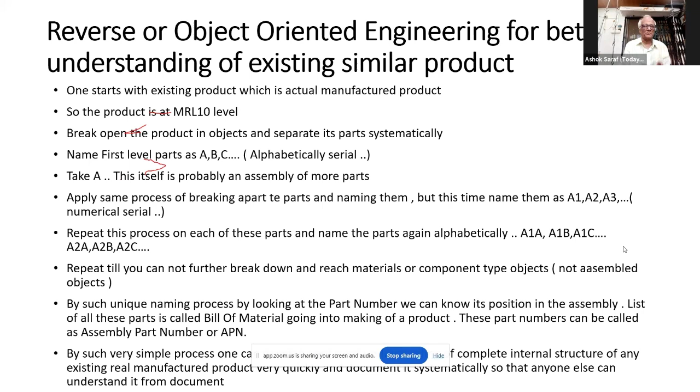Okay, next slide, please.

So the same structure view, because of this numbering, even if it is in the form of a list view, simply by looking at the name, you know the level at which the product is and who is the parent of that product. So this is a list view, which is typically what we have in a bill of materials. So by dismantling an object, dismantling a product, we can create a bill of materials. And by naming the products in a systematic fashion with alpha at one level and numeric at the next level, and alternating it again, we can have a list view so that we know precisely where that part or material belongs in the main product.

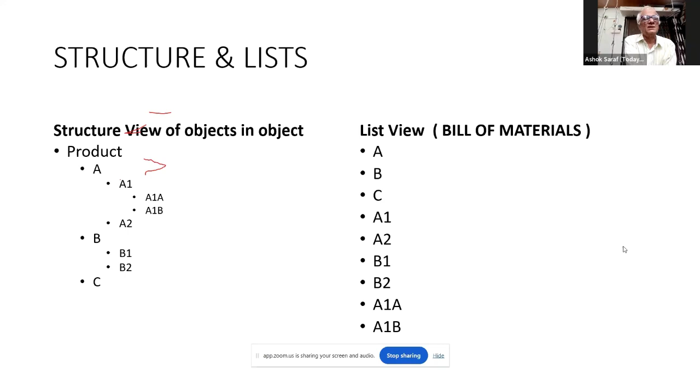Next slide, please. Now, the reverse engineering process brings you to the bill of materials. That means you get a list of materials, but it is useful for keeping track so as not to miss out any objects when you reassemble them. But how can we make use of it for entrepreneurship or for setting up a production?

Now, for each of the materials in the BOM, there has to be a process. So the simplest process may be a purchasing process to acquire that product from the market. When you go to the market, you can't just say, give me this A1B, which is looking like this. Of course, you can take a sample, make a drawing, or take a CAD model. Then you go to the market, find out if it is a standard item, then you know the manufacturer and have the manufacturer's part number for it, and that is when you can purchase it. You may have manufacturer 1, manufacturer 2, manufacturer 3, each one having his own part number. So you have MPN, manufacturer part number 1, MPN 2, MPN 3, to get 3 quotations from 3 manufacturers.

So a purchase process can be defined for purchasing this material, or the material may be machined. A part may be machined by acquiring a raw material and then machining it. So machining will be a process. You can describe the operations of that machine; it might be turning, finishing, facing, and so on. Or it might be an assembly, so the assembly process can also be described.

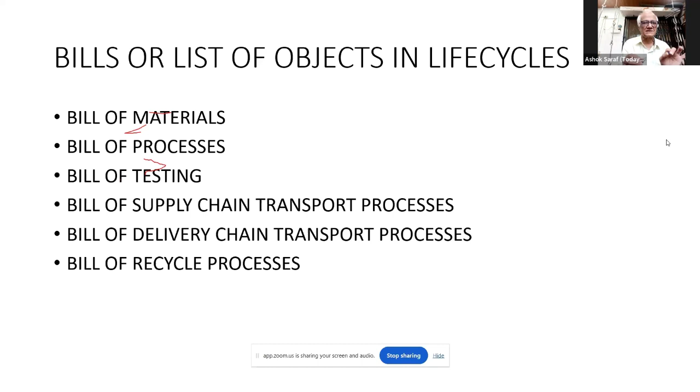Now, why do we create such lists? Everybody knows that manufacturing an item - really bringing it to life, hundreds of thousands every day - is a very complex process. Imagine manufacturing a Boeing 787, or even manufacturing an automotive vehicle - there are hundreds and thousands of parts. So there is complexity.

So we know that in companies, a divide and rule approach is used for dividing the whole into parts. Then you have processes for each part and processes for assembling them. That is how we can handle the complexity.

Now, if you make this list and generate this information, that can be a good starting point for taking decisions and working out scenarios - if something is changed, what other things will get impacted - because you know the interrelationship of parts within a product. You can even plan strategies related to production, distribution, and recycling based on this fundamental information.

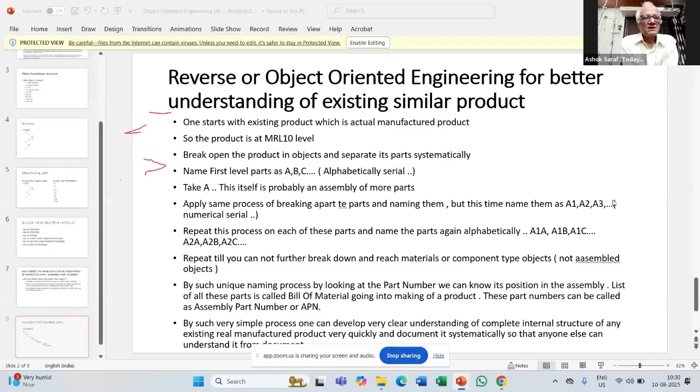Okay, so I think the idea should be clear by this time. Now, there are people who say, why this method is being proposed? Where did I think of it?

The story goes like this: about 40-42 years back, when my son was about 5 years old, we were coming down from Jejuri by ST bus, and as a time pass game, I thought of playing a game of Rachana. I would tell him an object - like the lamp in the ST bus, consisting of a cover, a lamp inside, and some wires - and explain its Rachana. Then he would tell me some object, and I would tell him the Rachana.

Within about 10-15 minutes, we were going from physical things to even abstract things, and we started talking about the structure of music. I was zapped - this 5-year-old boy and myself, within 15-20 minutes, got into a dialogue for critically analyzing things. I realized the power of the concept of structure, which we all know in manufacturing industry as well as in software. The structure carries very important methodology and a source of knowledge of relationship of things or objects.

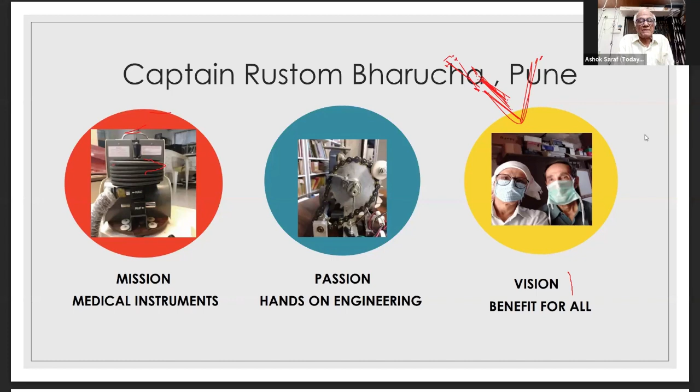He activated the entire ecosystem in Aurangabad and set up a capacity of producing 10,000 of these machines per month. Practically, he made about 100 part sets, assembled about 30-40, physically drove and carried them to AMTZ Vishakhapatnam, and got it tested.

Unfortunately, because it did not follow the modern ventilator principles of using electronic sensors and giving indications and alarms, doctors found it a very rudimentary though reliable device, and there was resistance to it. There was a special meeting in Delhi.

But the point is not that. The point is that this device fortunately was not required because Corona got over, and the normal expensive ventilators were made in large quantity and many companies got into it. But the process of reverse engineering could establish the manufacturing capacity of 10,000 ventilators per month at a cost less than 10,000 rupees each - that was an achievement.

Now, reverse engineering and understanding products - we have seen this every day in the repair mechanics on the street side. We have also seen how IBM PC was well documented, and if the information was available in documented form - circuit diagrams, materials list, software listings, and so on - how Taiwanese could manufacture IBM PCs, so much so that all other models of computers are completely forgotten now, and we only know computer as a PC.

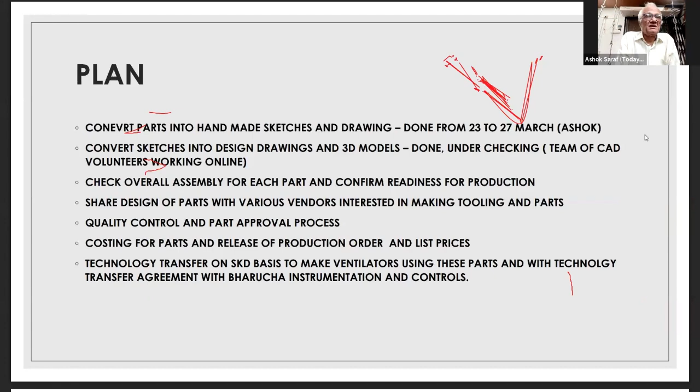China has used this very much. Japan used it very much. When we were in Philips, there was no Japanese student, but we were told that when Japanese come, they would document everything by seeing things, and then they would start making it. And so this process of learning from things

and creating knowledge and information is extremely easy, available, and being practiced. Unfortunately, a lot of our engineering people, including me, when reverse engineering was being promoted as a way of working by Shekhar Kulkarni,

I was fighting with him. I said, no, I'm an engineer, I would like to design from scratch, from fundamentals and theory. And we had an argument. He said, Rani, you will remain completely poor. Look at me, yaar, I'm just making this solenoid. I said, okay, fine, it's good for you. But I continued not doing reverse engineering.

And then you have heard Girish, who followed that advice and how he became a good entrepreneur. So the moral of the story is that it is an excellent process - an excellent process for rapid creation of information, knowledge, and even economy.

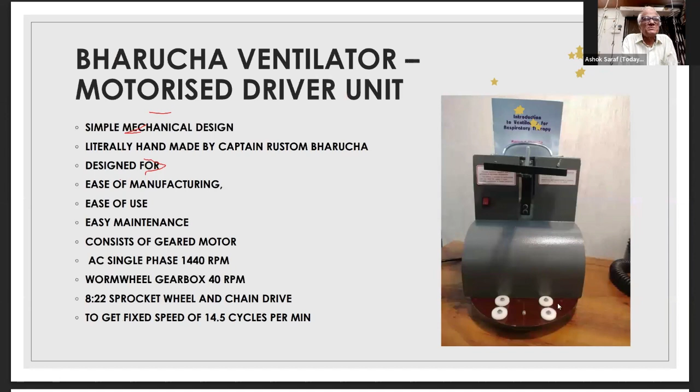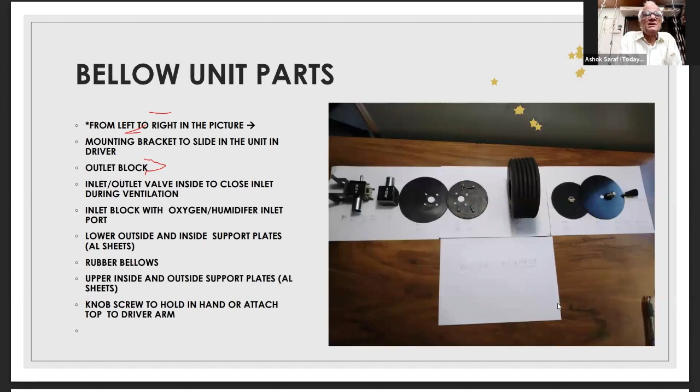It is something that should be practiced even in first year engineering, so that students will learn how to dismantle things and feel confident. Then they'll learn that they can't put only names and descriptions - they have to be able to make a picture, drawings. They will learn to make CAD models. They will learn to look around in the market to find how to get those parts. They will learn how to make those parts. Most important, even if they get the parts, they will learn how to systematically rebuild those products.

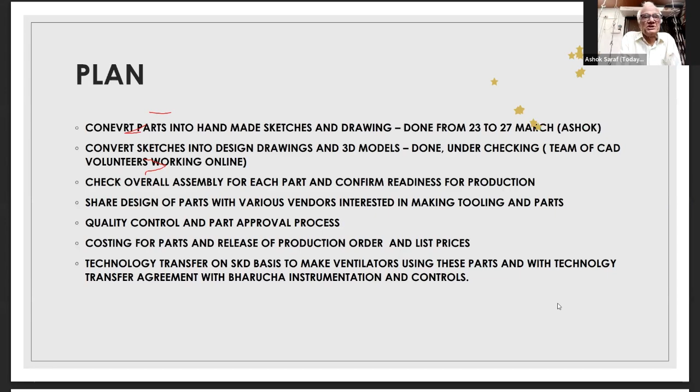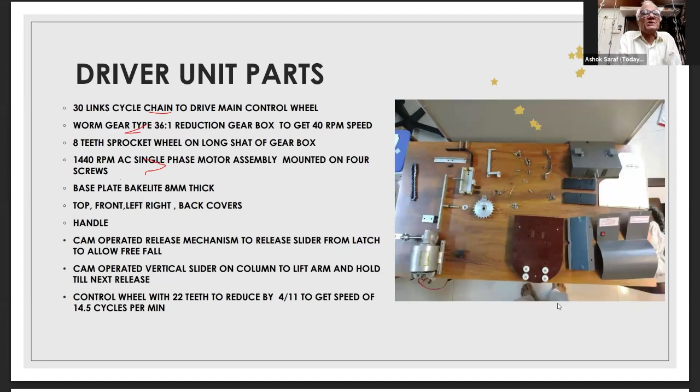And this, I think, is the power of this process. Having realized that power in this variety of ways, I'm trying to promote it as object-oriented engineering, because often reverse engineering had a connotation, in my mind, that it is copying, and copying is bad. We are told right from childhood, don't copy, because we think copy means copying answers in the exam paper. So copying is not the key part here.

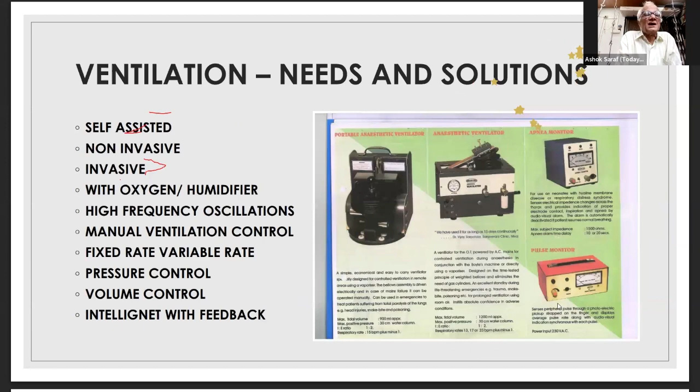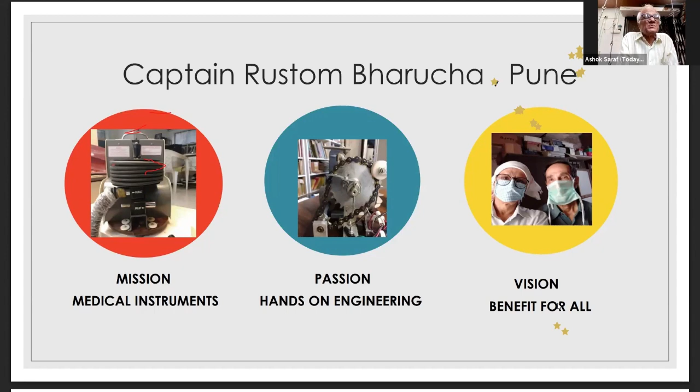Learning, analyzing, and systematically creating documentation is the name of the process. So thank you very much for giving me this opportunity to explain this concept, especially the APN part, which I actually invented out of necessity to manage about 60 students doing reverse engineering on all old parts in one workshop in the college. This is when I thought of this scheme of numbering these part numbers as assembly part numbers.

So one or two companies, while developing a new product, had followed this process and benefited from it, but they were not doing reverse engineering.

But I said, even if you are doing a new part, in order to communicate what that part is within your organization, you follow this APN numbering as assembly part number. We always have your storage part number, which is the stores part number, which we can call SPN. And there is a manufacturer's part number if it is bought out, which is an external part, so that is MPN. So APN, SPN, and MPN are three ways of numbering parts for creating information of any product. Thank you very much.

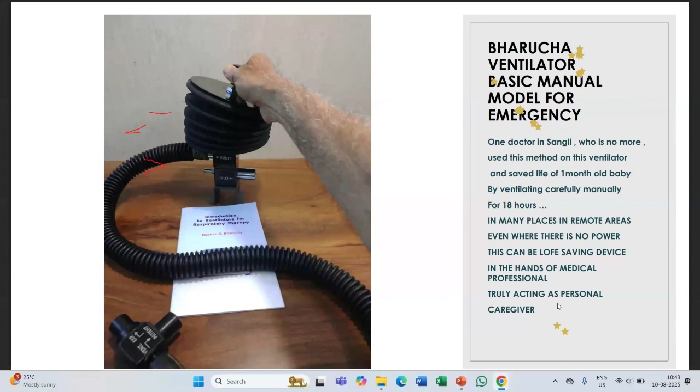Like I gave you an example of a pen, today, before end of the day, please take any one object which you can fully dismantle and create this bill of material with the APNs. Believe me, doing it yourself is fantastic.

Yeah, thanks. Hi Vilas, sorry, long time no see, I was traveling a bit in Kashmir. Ashok, lovely to see you as usual.

I just wanted to check with you how many of these principles you actually used for your first assignment at Philips when you were designing products. And the second thing is, in the current generation with automatic and QR codes along with RFID defining parts, I think there might be an ability to converge and have one single part number at various stages in the entire manufacturing process, provided of course we have the equipment to identify as well as classify. What would be your comment on that?